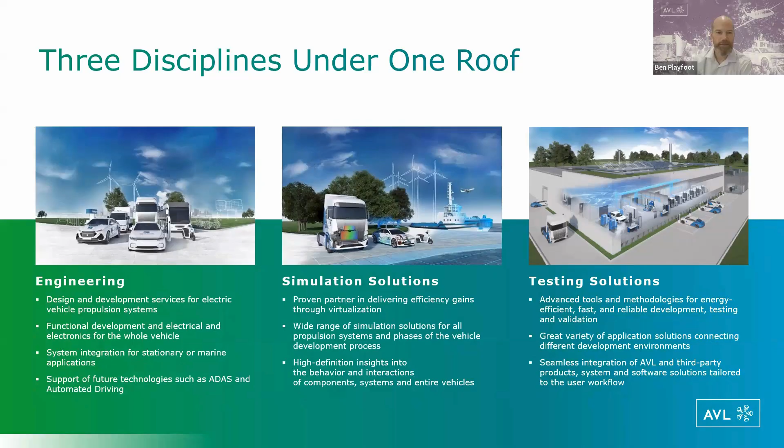We sell test equipment all the way from conventional engine dynamometers and test equipment, instrumentation, data acquisition and control systems, all the way through to battery energy storage, cyclers, emulators, and test cell controls. So we'll go into those three areas in a bit more detail here. Next slide, Brennan. Okay.

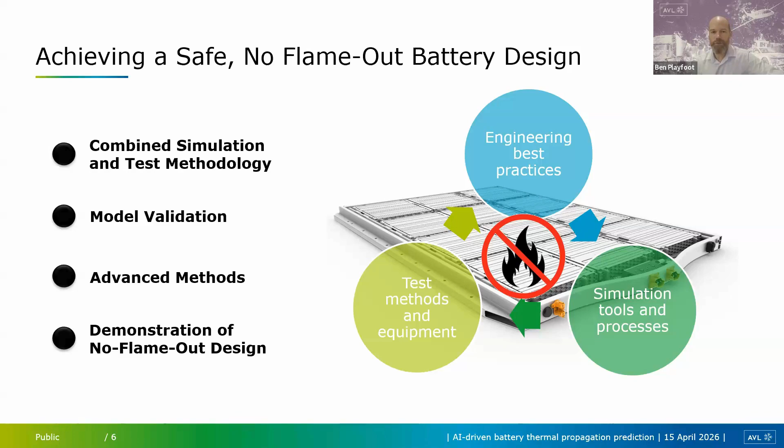Great. The presentation is comprised of going through the combined approach of simulation and testing that I'll take you through, and then getting a bit more into how we validate the models, and then advanced methods and data analytics, and also demonstration of a no flame out design. And again, this is really focusing on the three pillars of the engineering division, simulation tools and processes, and also the test methods and equipment, all leading towards a no flame out battery design. Next slide.

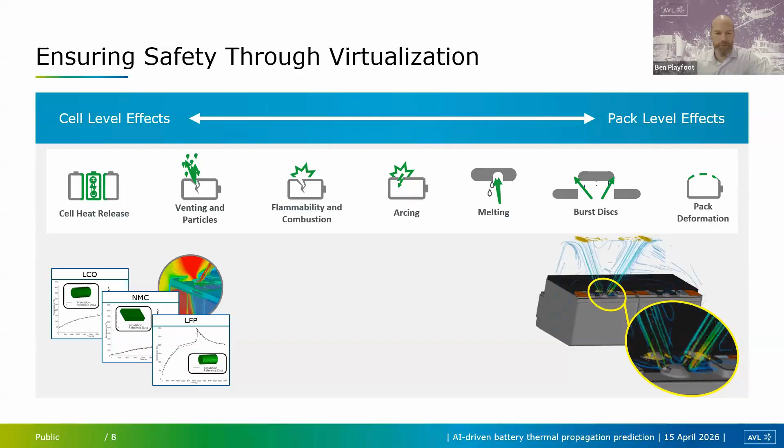And again. So first of all, I'll go through the summary here of kind of the factors that we look at. So maybe just page down one more time. You can see when we consider thermal propagation, we consider, of course, the cell level attributes as well as the pack system level attributes. So quite a few different effects that need to be considered and simulated and tested.

We rely on a combined simulation and test methodology. Simulation models are quite accurate at this point and represent the physics very well. But there's also physics that is somewhat stochastic and less predictable that we need to capture in the test data. So really, we rely on a combination of test and simulation.

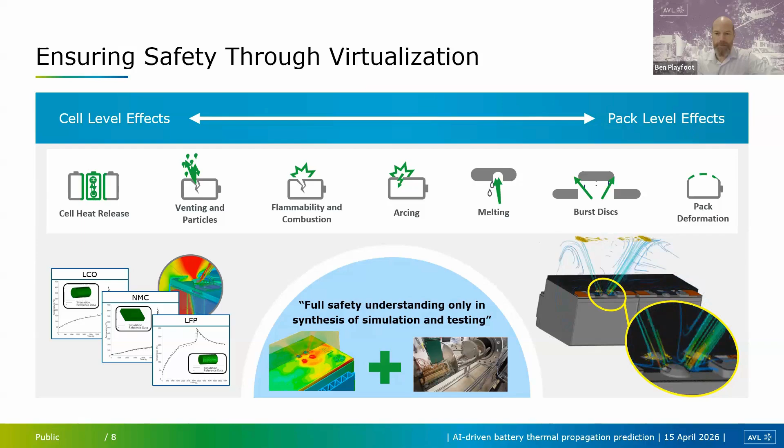Next slide. So talking a bit more about the process, the engineering process here. So when we characterize a cell runaway behavior, we're trying to characterize the behavior shown on the left-hand graph here. So in terms of the heat release versus time, the stages of heat release before and after the vent opens. And really, that whole characteristic, including the gas flow, the particle flow, and so on.

So the middle column here shows a typical cell characterization test that we conduct in an inert gas. And the typical quantities that we measure are, again, the heat release, so thermocoupled battery cell, as well as thermocouples around the chamber. So the gas temperature released, the gas pressure, the volume of the gas from the cell, and also the composition or species of the gases from the cell.

We also analyze the particles, so the particle trace with high-speed cameras, and the composition, so material analysis of the particles coming out of the cell. And then typically these tests are completed multiple times to try and get an assessment of the variation from cell to cell. And then, of course, we have multiple methods of triggering the cell, depending on what we're trying to achieve. Most predominantly, we use a heater pad to trigger, though.

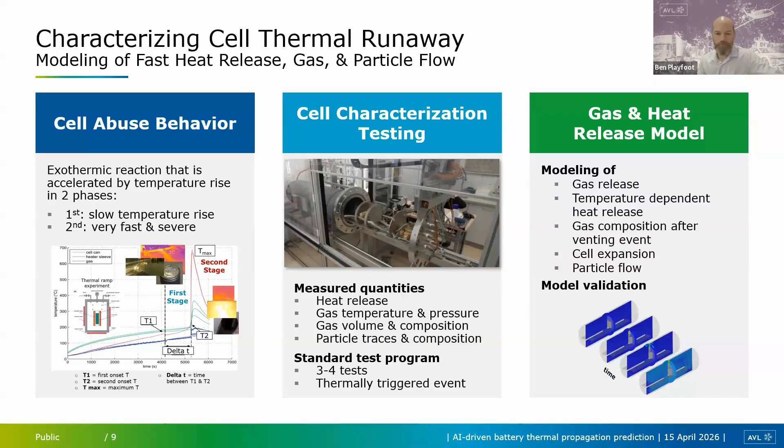But of course, as I'm sure many people on the call realize, a relatively small change in the cell composition design can have a significant effect on the results. So we prefer to always use this approach of characterizing the cell in test and then tuning the model. Okay, next slide.

And then taking that further to look at some of the other attributes, particle characterization. So as I mentioned, we conduct optical measurements during the runaway event in the chamber to understand the flow of particles. We analyze the particle size and composition after the test. We also conduct our abrasion testing, so understanding the abrasivity of the particles against other materials or components in the pack, and use that to correlate abrasion predictions in the model.

And then we've got the arcing characterization portion, so using arc tests with various gases, various electrode designs and electrode spacing and so on, to characterize the model behavior. And finally, on the right-hand side, showing the flammability.

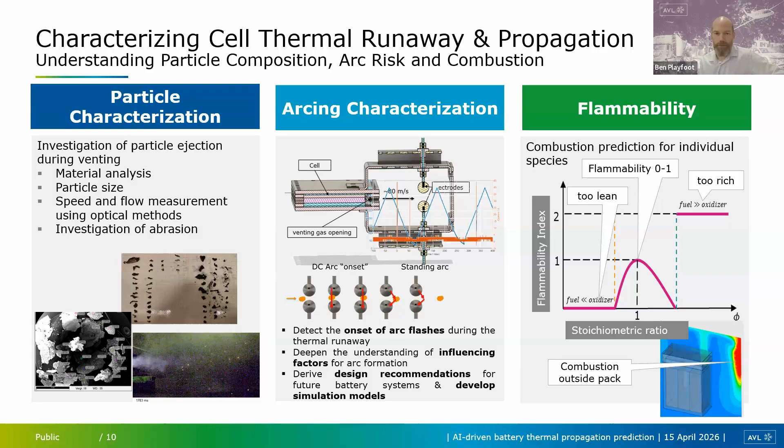So of course, we've got decades of experience in combustion prediction in internal combustion engines. So it's really taking that methodology of understanding the likelihood of flammability based on the stoichiometric ratio, the ratio of fuel to oxidizer, to really understand the likelihood of an ignition of the gases. Okay, next slide.

And then, pulling all of this together, this shows one example of correlation activity between test and simulation. So the column on the left shows all of the main inputs at a cell and a cell stack level in this case. I won't go through them all in detail, but the graph on the bottom is perhaps more important. It's showing the comparison of the predicted cell heat release in red to the measured cell heat release in gray, and essentially a good correlation, good comparison there between the two.

And then in the middle, the main graph here, we have the time to propagate between cells. So we kind of have a zigzag curve of low propagation time and then followed by a higher propagation time as we go across a thermal barrier, and then a quicker time between two adjacent cells, for example, between cell 2 and 3, and so on.

You can see the correlation is very good here until we get to the last cells, and we show in this study, the graph below, the stochastics in the thermal runaway behavior really begin to kick in here as we get further through the cell propagation. So the variability essentially in the test results can be seen, and we don't have that same variation in the simulation.

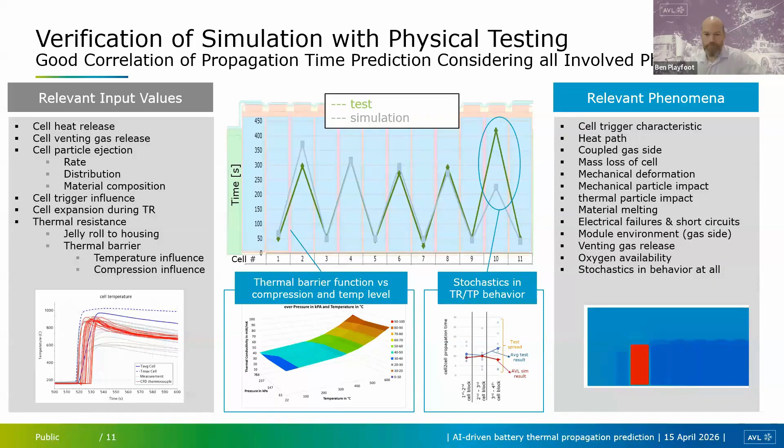For some reason the movies are not playing here, but yeah. Oh, there it goes. So basically just showing here the visual representation of cell-to-cell propagation. Okay, next slide.

So the other features in the module and the pack are really about guiding that vent gas, allowing expansion of the vent gas to cool it down, having appropriate structure and particle traps in the design to enable particles to drop out of the air and prevent further initiation sites.

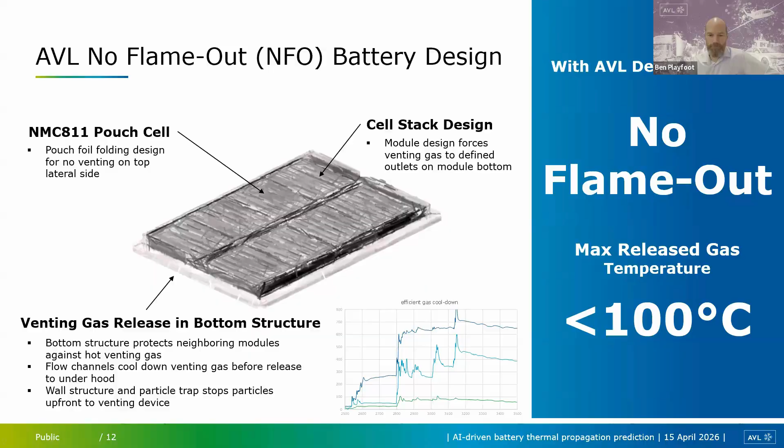Okay, next slide. All right, Thomas. Yep, I'll try to take over here. So let's see if it works for me. Otherwise, I will simply ask Brennan maybe to advance the slides, but I will give it a shot. And yeah, I think it works.

I will explain a bit how the AI-driven approach comes into this entire equation and why we state this at the moment, and explain in more detail the simulation technology behind the process that Ben just laid out.

Let's see if it advances. Yeah, I think I also struggle to advance the slide. So if I may ask you. I can go. I can do it. It looks like it was not working.

Yeah, no problem. So at the core of the simulation technology, we are using 3D multiphysics computational fluid dynamics, CFD, to describe the thermal runaway phenomena such as the venting gas flow, high turbulence, flammability, as Ben mentioned. You see an image here on the left side of a module that has a melted portion and also hot venting gas coming out to a lesser degree.

And here comes the connection to manufacturability. We also use SPH code, smoothed particle hydrodynamics, to simulate the injection of thermal barriers, potting foams, or any adhesives that might be crucial. But truly, these are the more detailed simulations, and typically they take hours, days, sometimes weeks for a very large pack in very high detail. So it really gives us the maximal detail possible.

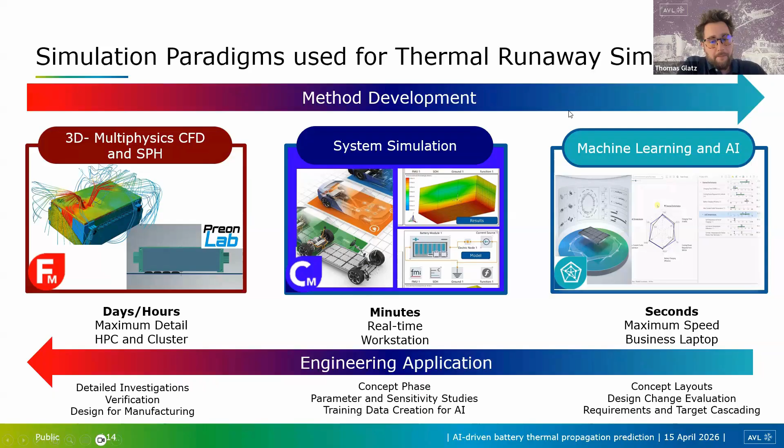To give you some impressions of the multiphysics 3D CFD: at the foundation, we need to cover the normal operation, the basic effects, such as conjugate heat transfer, the heat generation of the cell under normal operation, but also all relevant materials in the module and pack, such as insulation materials, bus bars, any housings, heat transfer to the environment, and the cooling system. That's really the basics. And on top of it, we put our hazardous effects.

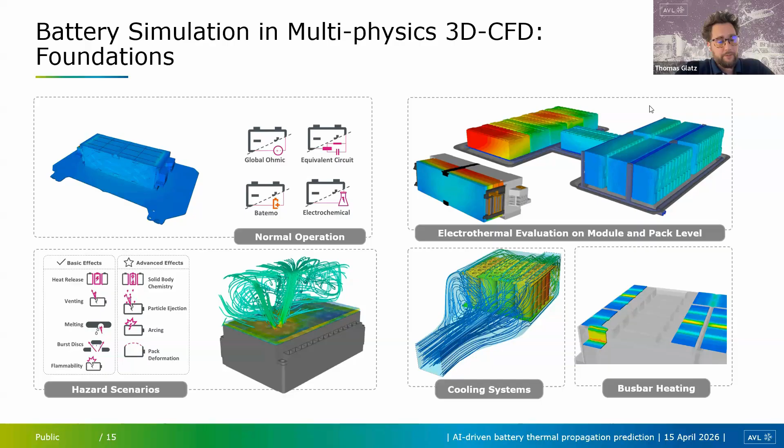If we go to the next slide, we should see in more detail what we are doing here. So as Ben mentioned, the basic information needed for such a simulation is the cell information. And here comes the connection to manufacturability. Ideally, we have very reliable cells manufactured with very fine tolerances that are as equal as possible, so one measurement can really cover the effects. But we need the heat release to describe the venting behavior of the cell in the model.

We would cover melting mainly by the material parameters of the materials involved. We need to consider the burst disc, both the location but also the behavior of the opening of the burst disk, for example. And then we would simulate also the flammability. I think there are a few animations; if we move on one slide, you will get a few impressions here.

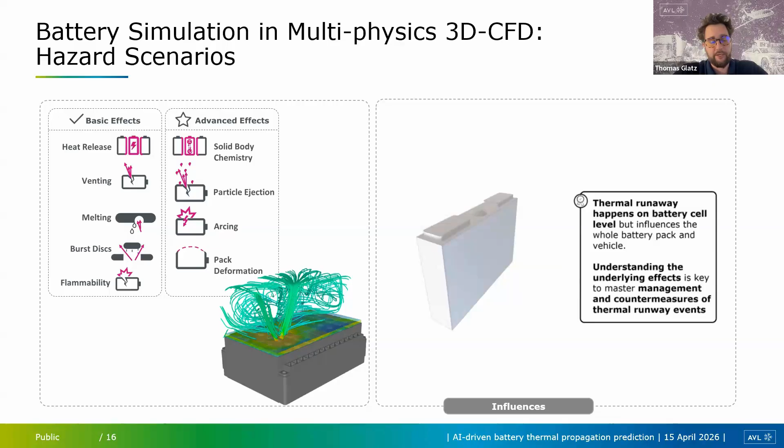We do also cover advanced effects, which are really more sophisticated, and this especially involves the particle ejection that Ben mentioned earlier, arcing risk, or we would also pair such a simulation with additional crash simulations, for example, deformation of the pack, where venting gas flows might change, and evaluate such scenarios.

So here you see on the animation a quick depiction of typical simulation results of such a high fidelity simulation. And this gives our engineers really good confidence and guidance on whether their design in the end works well. If we move to the next slide.

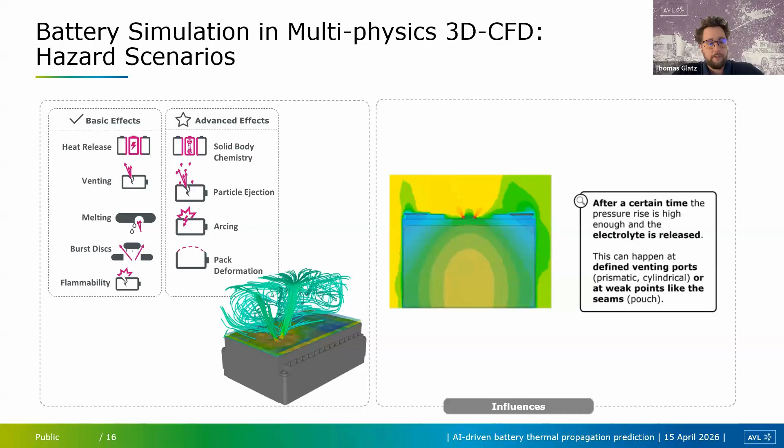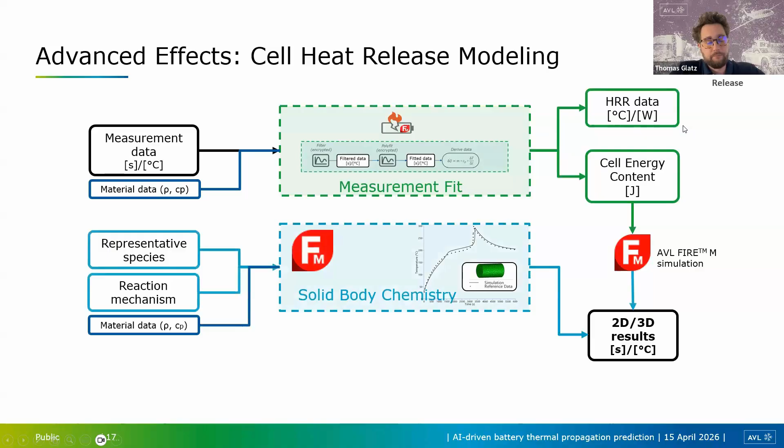And I just see that I should stay a bit in time. So with one more animation, we have basically three variants of how we can cover the heat release. The most straightforward and also most reliable version to date is to do a measurement fit based on measurement data of a single cell or a few cells in a mini module, so to say. And we would use the direct output of that measurement directly in our software with some conversion tools.

However, it's becoming more and more a topic to use these types of simulations earlier, before you know exactly how the cell would behave. And here a solid body chemistry approach comes into play, where we say different types of the cell or portions of the cell we can describe with different representative species. And then in the simulation we basically burn these representative species with a dedicated reaction mechanism. This allows a more predictive approach, and it works quite well, also proven from literature for different chemistries.

If this is not sufficient, or something more is required from a cell technology, for example, something really novel on the market that we cannot describe yet with the existing models, we can also use an empirical model on top of it, or user-coded model, so to say, that can be freely populated. This is depicted here as a smart formula, where the smart part is that the user does not need to take care of the coding part per se and how to connect this to the CFD solver, but really can focus on the empirical equation at hand.

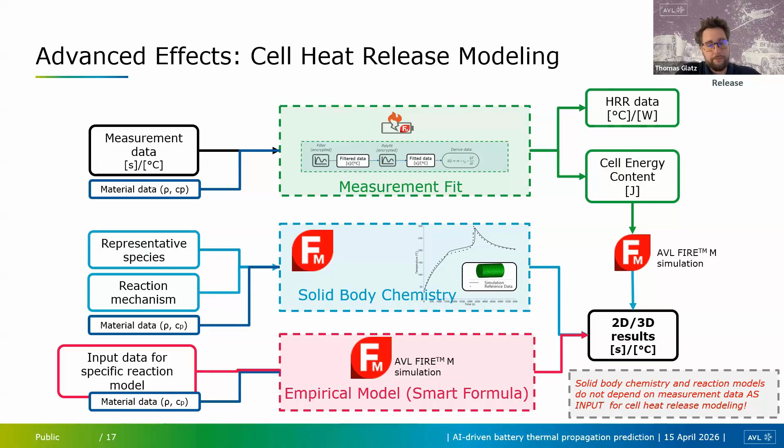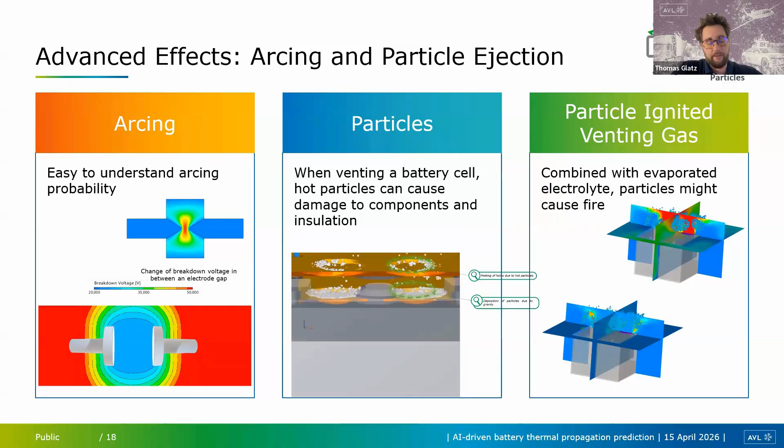Yeah, with the cell heat release out of the way, if we move on. We can then focus more on the advanced effects, and the test that Ben mentioned we use to characterize arcing and particle ejection. For example, as you see here in the middle, particles coming out, hitting a barrier and melting it much faster than just the pure hot gas by itself. So we really saw that we need to include this in the higher fidelity simulations to get accurate results, as it can make the difference between a no-flame-out design or a design that's more conventional, let's say it like this.

And we do combine these capabilities also in the simulation, so that the actual venting gas behavior and the hot particles interacting with it can increase the flammability of the gas, but also can lead to higher arcing risk across the module. Yeah, as I say, more advanced topics, but I think definitely worth looking into them.

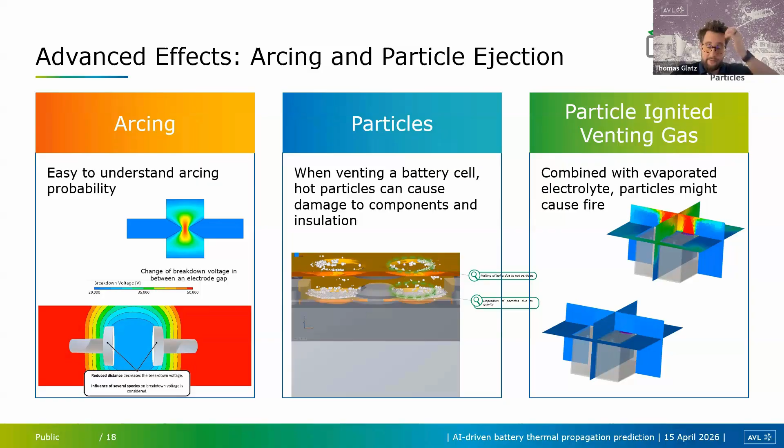With the main challenge on the next slide, we see a bit of how we bring this into system simulation. So we really need to get from a 3D CFD on the left side, something really complex with a lot of computational cells, to something more abstract on the right side, where we model the crucial parameters and parts of the models with individual blocks. For example, you see some blue blocks that represent the gas volume, gray blocks representing the housing, and blocks modeling the battery modules and chemistry itself in such a system model. And this runs much faster.

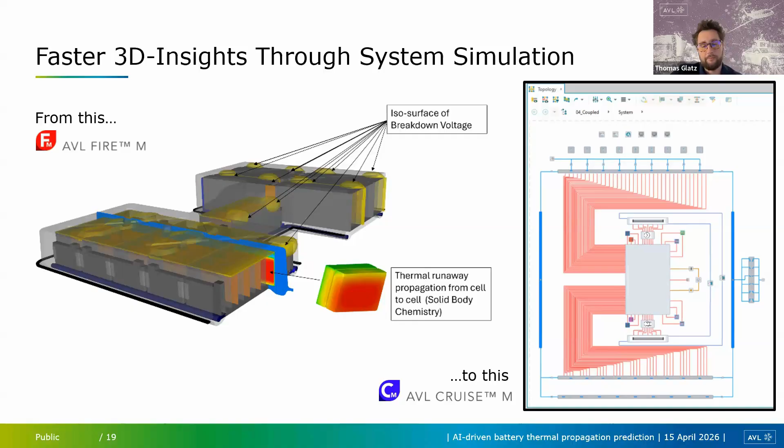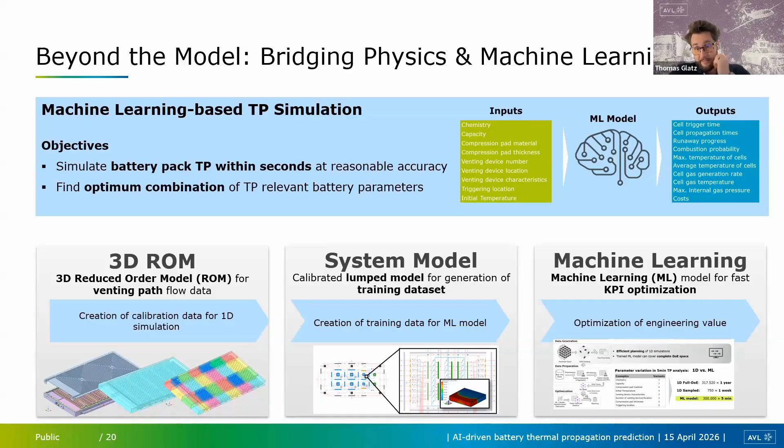So we are able on the next slide to really put this into a workflow to train AI. You see at the bottom the earlier described workflow, and also an impression of how complex these models can get on the system side, but it's very worthwhile producing such a model because it allows us to simulate a battery pack thermal propagation within a couple of seconds instead of days or hours before, and allows us to find an optimum combination of thermal propagation relevant battery parameters. And on the next slide, we see an example in more detail of such a system model.

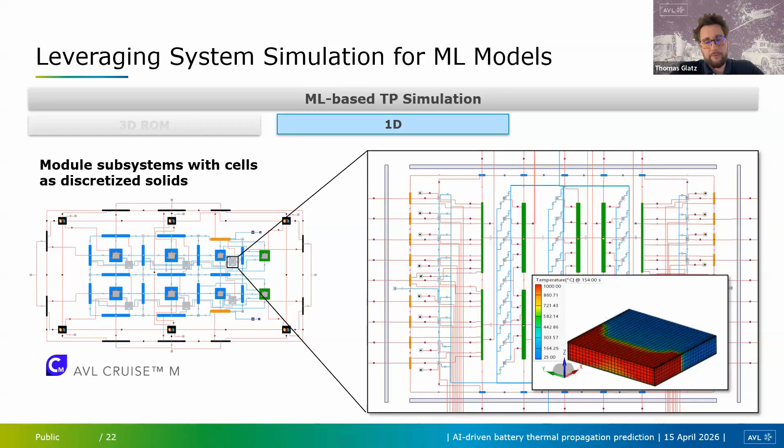But if we move on even further, we do see an example use case. And here you see, for example, the level of discretization of a module that we would typically use in such a simulation. But ultimately, we want to get to an AI machine learning model that we now can use to, for example, vary different parameters such as the compression pad material, the thickness, the venting device numbers, and really investigate the trade-offs for respective outputs that might be relevant.

So, for example, we could look at the trade-off study here, combustion probability at a certain location versus cost of the design. And for example, these 450,000 configurations with the trained machine learning model, you're able to evaluate in 8 minutes. So you can really screen the entire design space and find the 2-3 best candidates for your design.

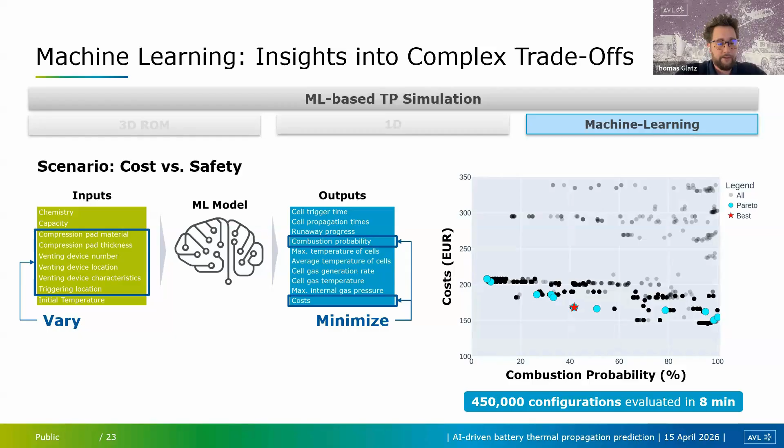And obviously, in a more complex production setting, this would be an even more widespan study. For this example here, I think if we move on, the final result was then to use a specific thickness on the sheet here and specific venting flow devices. But this is the design guidance you basically get out of such a trade-off study.

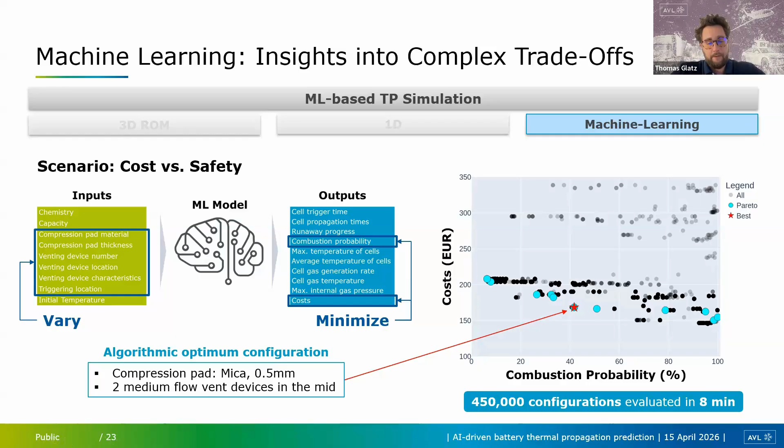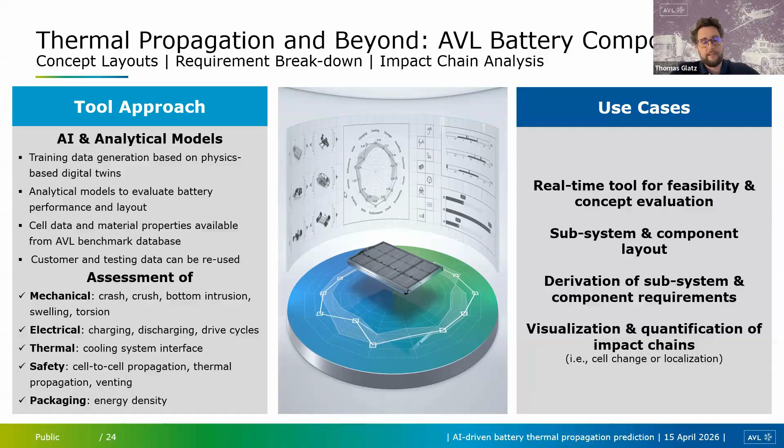And to make this really accessible, and here kind of comes the buzzword AI a bit into play, we package these machine learning models into a compelling tool where you really have a nice GUI and can operate this. Even a novice simulation engineer can operate such a tool fairly quickly and get quick results out of this.

And I think on the next slide we will see a quick impression of the actual packaged or finished product, the finished tool. And all the machine learning models are actually interchangeable, so they can be updated as more data comes in. This can be highly customized to the respective use case of the respective industry. So it's really quite a nice approach.

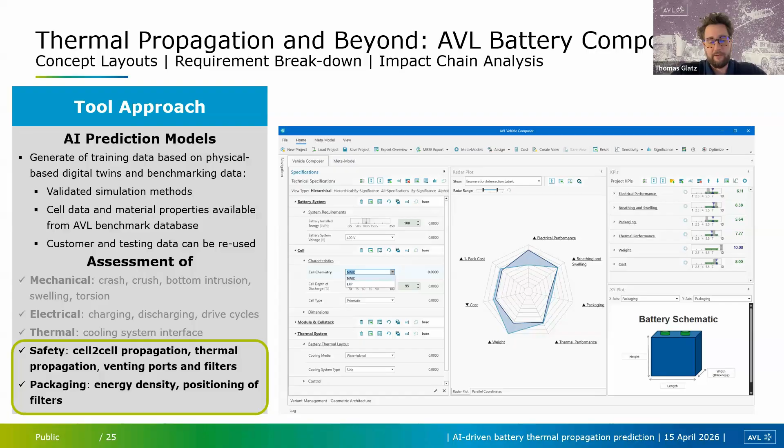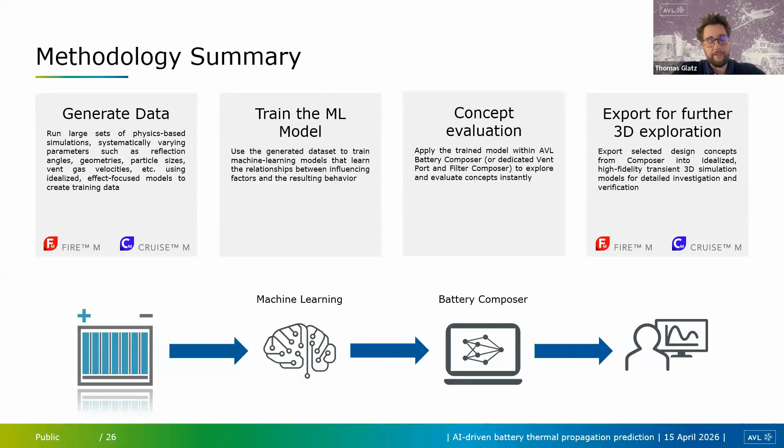But yeah, to finish this off, the models obviously are only as valid as the test data they are based on. And here I would like to hand over to Brennan actually to explain to us in a bit more detail how we can gather really highly validated test data.

Thanks, Thomas. Yeah, in the interest of time here, I'll try to be efficient. I think my colleagues here did a great job doing an overview of what it takes to get to a truly safe design by leveraging AI in a lot of the workflows. And as a critical part of those improved workflows using AI, AVL has a slew of tools that are starting to implement machine learning and AI themselves, a lot of which were highlighted in Thomas's section.

I'm going to sort of tie things together to share the idea of how this can be translated and handed over to a customer, to put the power into their hands to do a similar type of development, improving the safety, the speed and the cost of developing such a design. So on multiple fronts, here's the stuff that can be implemented in your workflows physically. And the first thing I want to debut here is the safety test chamber from AVL.

So data has to play several critical roles, especially when you're trying to leverage AI. Data becomes the most important thing, the volumes of data, but importantly, the quality of data. And on two ends of the workflow, right? You've got the training data, you've got to get a lot of experiments done. We're looking at a lot of different parameters and angles that both Ben and Thomas were highlighting. You're looking at the different failure modes, the different pathways of propagation coming from the cell level, perhaps the mini module.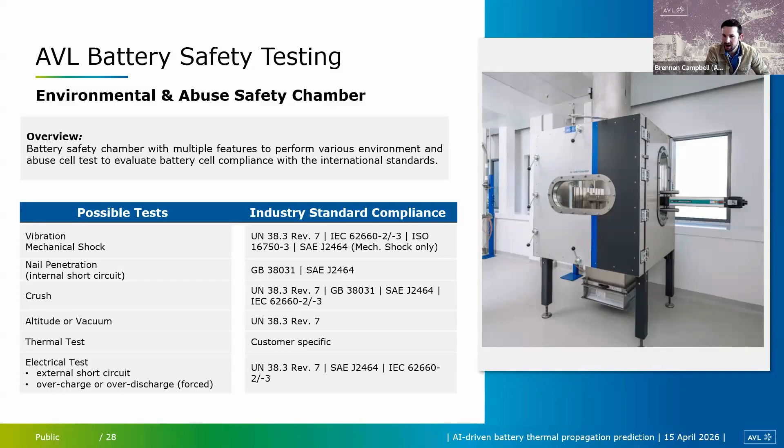And then electrical abuse tests. So you've got the external short circuit, overcharge. You can even do internal short circuit. And so this brings everything home to be able to run a high fidelity, highly controlled test environment for the user, for the battery developer, and also being able to accomplish that in a high throughput fashion, since a lot of tests are going to need to be done and a lot of things need to be measured.

Something people don't think a lot about as far as the safety side of things is the age of the battery. So this is our BCTS, which we debuted as a company last year. And there's been a lot of interest around a fully integrated ecosystem for getting a cell to be tested, degraded, and then ultimately even abused with really precise control, really accurate measurements.

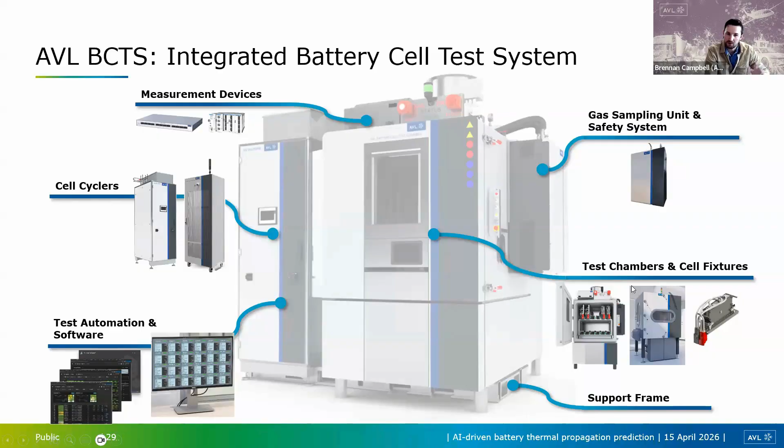You can also see the gas sampling unit is integrated there. So when certain thresholds of gas constituents are detected within the chamber, certain countermeasures can be implemented to immediately stop the test or proceed on to a different step of the test. You've got the cyclers and the power sources, everything contained in this cabinet with the cables completely integrated into the environmental conditioning system. This, like I said, can also control the safety test chamber, which I covered on the previous slide. And it all comes together with the test automation, which is Lynx here.

A lot of the battery test engineers on the call might be familiar with battery test software that you're using to control your samples. You might have dozens or hundreds or even thousands of cells on test at any given moment. Lynx is sort of the Swiss Army knife of battery test automation. It allows you to completely schedule, control, automate all of your tests to make the most efficient workflows and lab setting possible. And this includes the safety and abuse testing program for your cells and your mini modules.

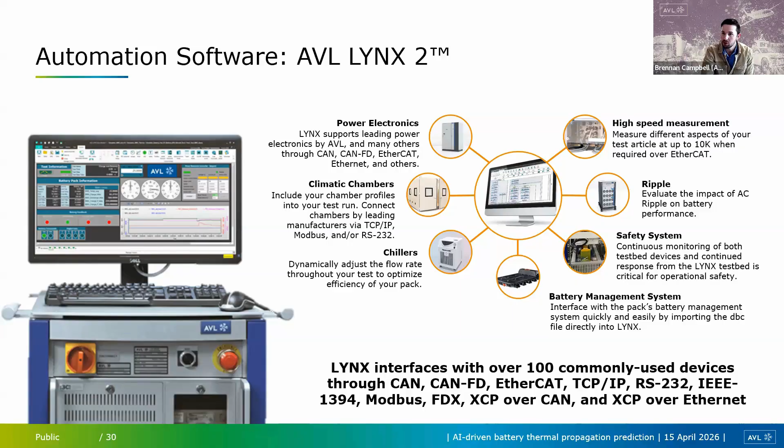So I'm hurrying along here a little bit because I think we're right at time.

So yeah, I wanted to importantly highlight data analytics, which is a software suite by AVL, and it is a lot what it sounds like. It's a data analytics package where you have a bunch of customized data visualizations that can be tailored to specific thresholds, metrics, signals that you're trying to flag, either statistical outliers or meaningful physical metrics, when something's starting to happen in the cells on test. You're going to be able to identify that right away.

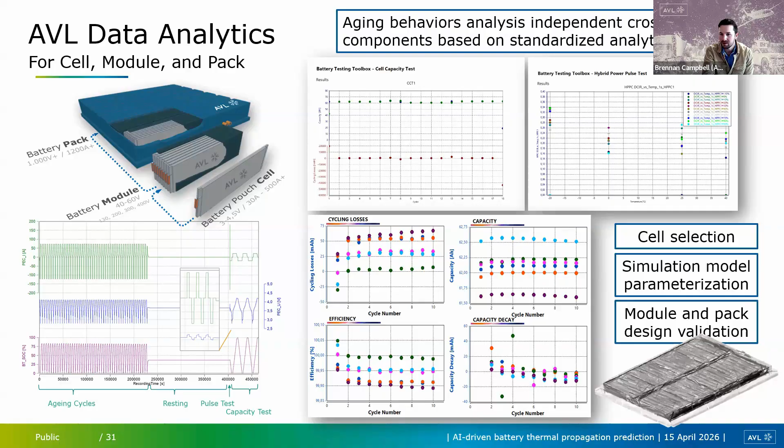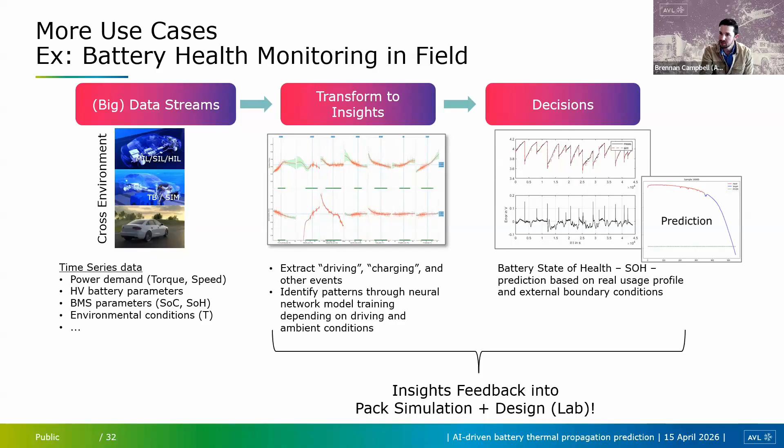And then all of these statistics can also be aggregated through this platform and extended beyond just the test field and out into the actual product field. So this is cross environment. It's everything from the lab bench all the way out into the field. When you really want to start improving your AI models, for example, it's critical to capture that field data and reincorporate it back into your design and test flows in the lab to do the side-by-side comparison. So the sky's the limit in terms of how rich you want the data set to be, but now you've got the well-controlled lab data comparing to what the field data is producing for you. So it's always a continuous improvement idea here.

This is a bit of a summary slide. Our customers now have the ability to take the hands-on equipment, incorporate that with the AI thermal propagation prediction instruments and models that they're developing, and scale a lab to the appropriate scale to capture all the safety critical parameters going into their design, to ultimately output something that's going to be a useful product at multiple scales.

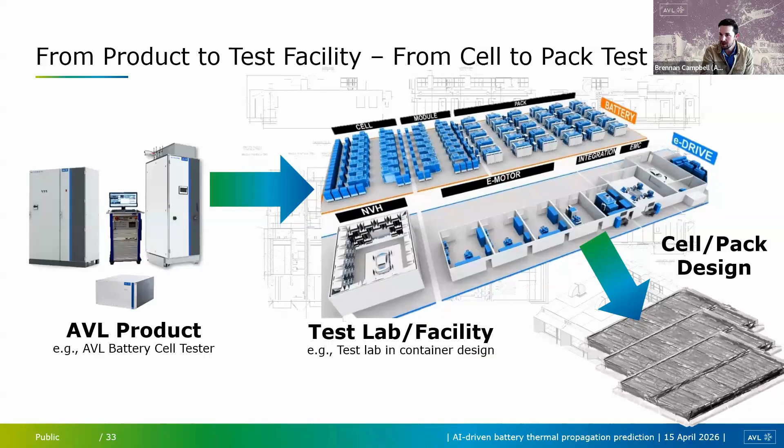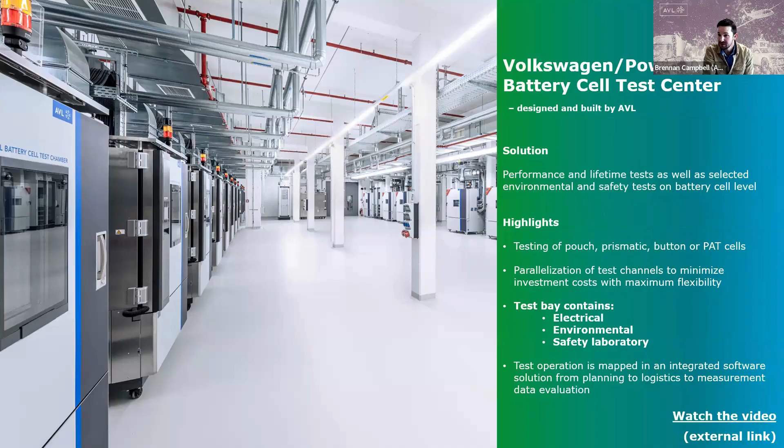And this isn't just an idea that's living off in a concept or the company portal somewhere. The BCTS, that's the battery cell test system that's fully integrated, has been deployed with our customer partner, Volkswagen PowerCo, which a lot of you might have heard of before, out in Salzgitter. Their labs have been fully outfitted with these integrated systems at scale to support their battery production at scale. So they trust these for their own workflows.